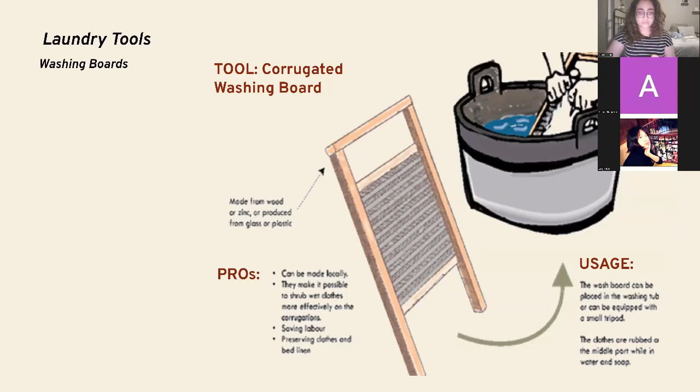Some tools used by people in these rural areas are iron trays, natural or man-made stone slabs, and metal barrels. Instruments like washing boards, washing dollies or plungers, and centrifugal hand washers can make doing laundry easier and more time efficient.

Source of water for community to do laundry. We have different sources of water in Freetown. First is the water wells, the tap, and this also is a water well, but we normally call it Jackie body. And this is a water mill at town. So these are the various sources of water that we have and that we use to do our laundry in Freetown.

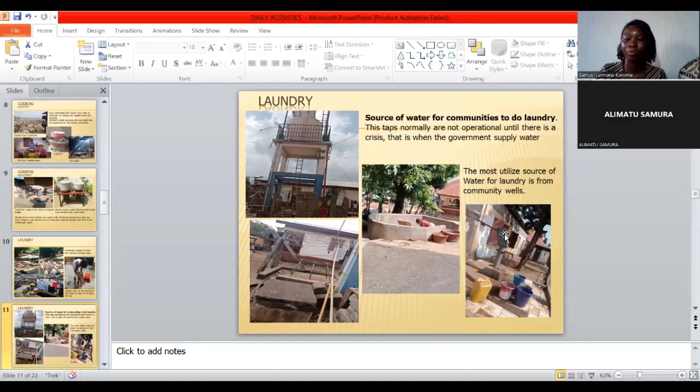Okay, I'm going to go through the toilet facility used in developing countries. My research focused on dry toilet that operates without flush water and covered 3 types of it.

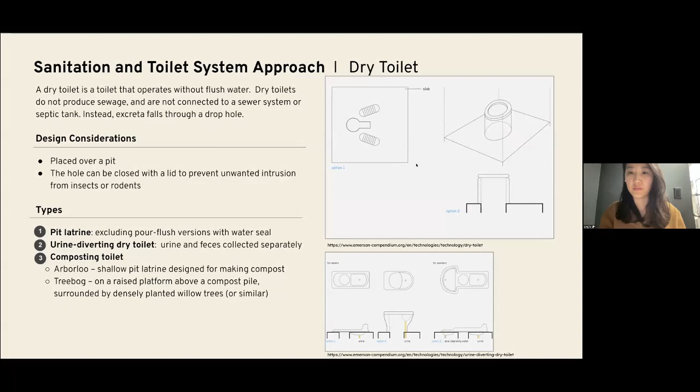Raised latrine is designed to minimize the risk of contamination in areas prone to flooding. This system includes the fence for ventilation, and the superstructure offers privacy and security, but it might not be inclusive design, and there's periodic empty cost and could be an unhygienic solution unless waste is safely disposed.

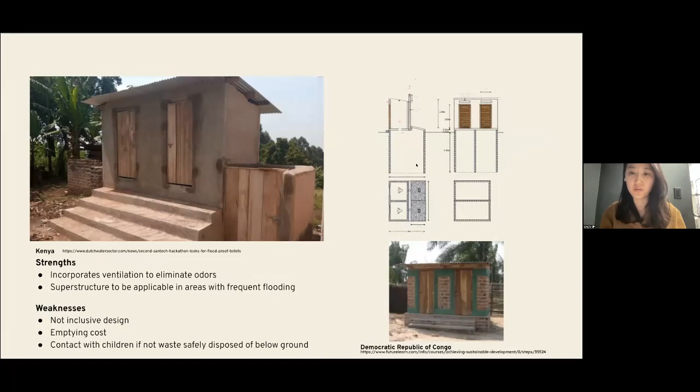Urine-diverting dry toilet typically consists of 2 separate collection systems, allowing for more efficient decomposition. They usually use sawdust to control odors and absorb moisture.

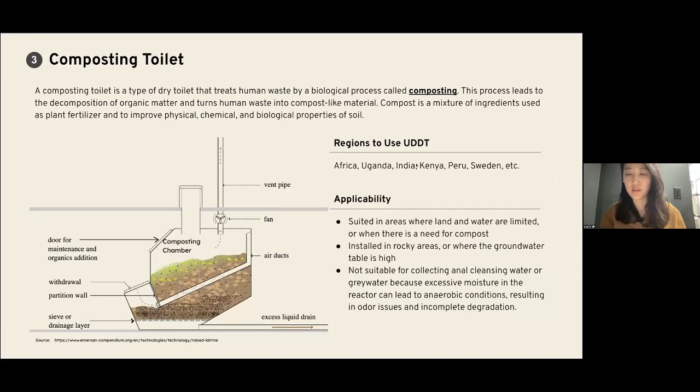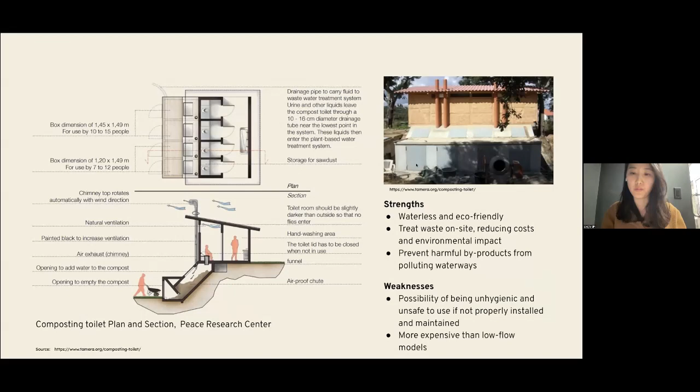Composting toilet is a system that converts waste into compost through a natural decomposition process. This is an example of composting toilet, and this system treats waste on site, which means it could prevent a harmful byproduct from polluting the waterways.

Continuing from there, we have an indoor toilet space. A space for buckets and water storage is very important for our toilets because most of the houses in Freetown do not have running water.

We also have a dedicated outdoor toilet, which is mostly used in some homes. The most common toilet, which is a pit toilet, is finished with porcelain tile, and it is mostly used in homes for general use.

Bathing in many rural areas is often a simple and yet enriching experience, marked by a connection to nature and a reliance on traditional practices. One method of bathing happens in rivers and streams, where access to plumbing and bathing facilities is limited. While this is an eco-friendly method, it can also pose sanitation and hygiene challenges.

Buckets and containers are another very popular method of bathing. Bucket baths are common in many developing cultures, not just in rural areas. To take a bucket bath, a person typically fills a bucket with water, often heated on a stove or with another heating element, then uses a mug or container to pour the water over themselves.

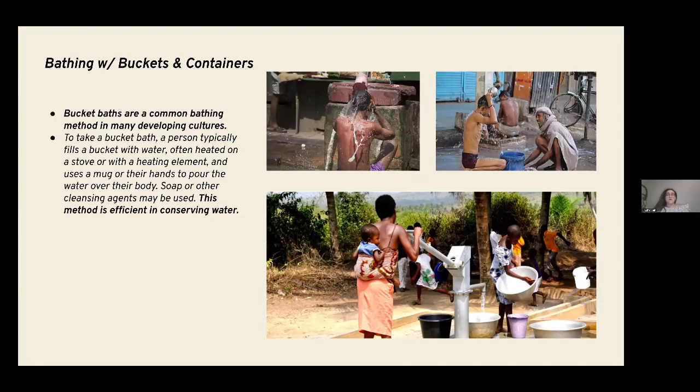Indoor bathing is where the bathroom is included in the building. Indoor bathrooms are mostly finished with tiles or fair-faced concrete, with space for barrels to store water for bathing. Most showers do not work because of low water pumping power from the local supply, which is not accessible to most homes. A wascup bowl used for bathing is used to collect water from the bucket and pour it on the head.

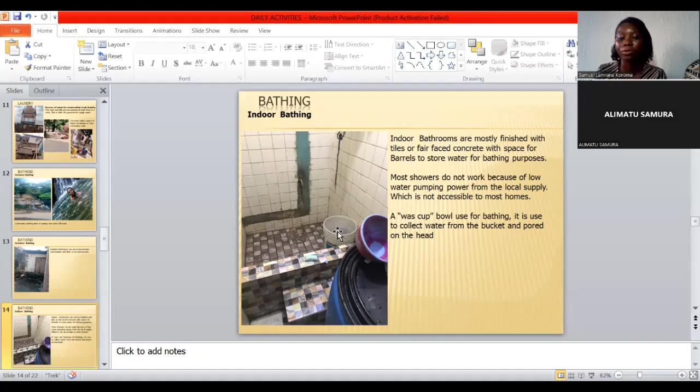Next, we'll talk about public and private spaces. One of the things we researched was what makes a great public space. There are 4 components to a great public space: accessibility, activities, comfortability which is included in the design, and sociability, which is the sense of excitement one feels when entering a space filled with other people.

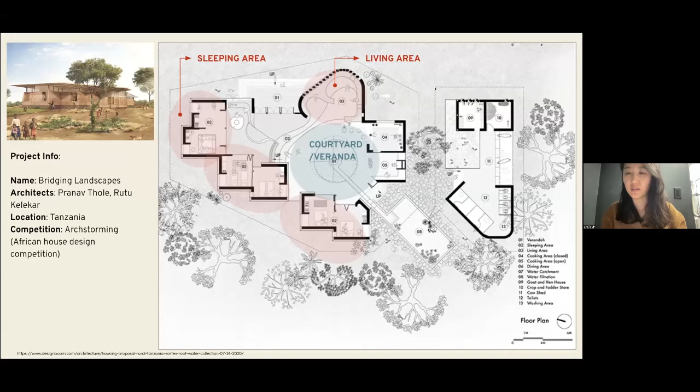I'd like to introduce 2 low-cost house projects in Tanzania. In the first one, I want to highlight a multifunctional space between the inside and outside, which is a large central courtyard functioning like a veranda. The courtyard is designed as a semi-open space, allowing opportunity for large family gatherings.

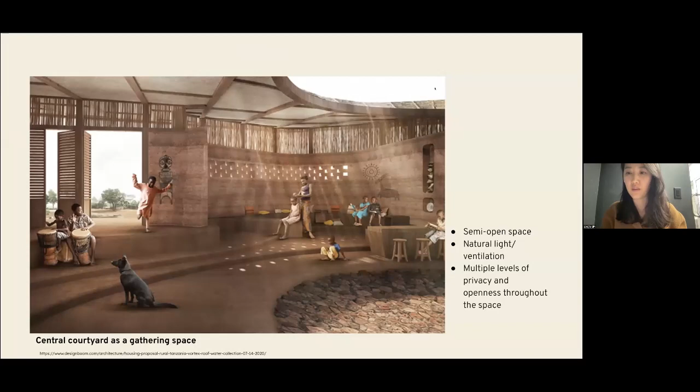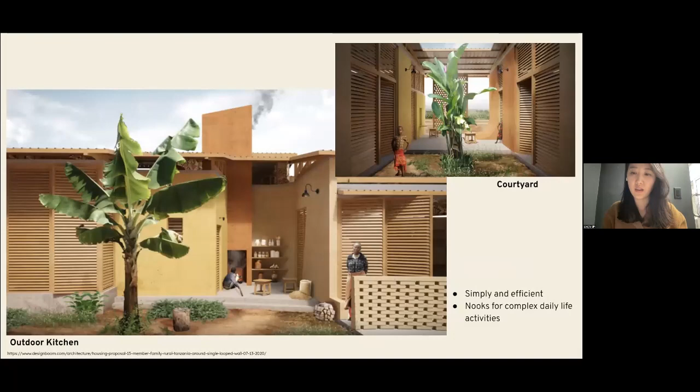The second project features a simple and efficient program arrangement along a linear axis on the site. It highlights flexible space with temporary partitions, utilizing nooks for daily life activities. This living area blends indoors with outdoors, generating healthy environments.

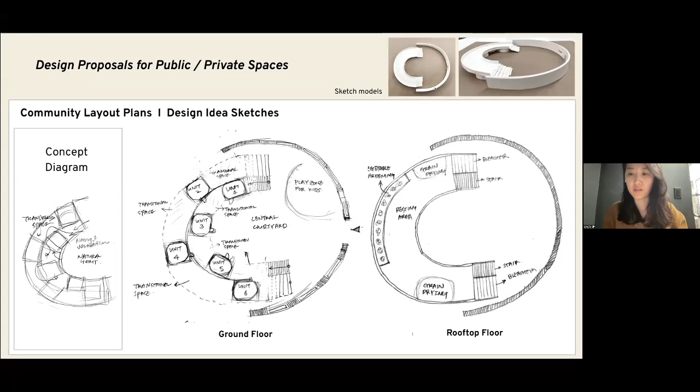Here I'd like to point out my design ideas for shared space in a community. Individual units are arranged in a zigzag pattern, and the rooftops are connected as a whole to more efficiently use the space. There are bleachers as part of the steps, providing space where people can interact. By building a C-shaped exterior wall, it can create a central courtyard, allowing various functionalities such as cooking and dining, kids play, relaxation, and so forth.

My design proposes utilizing the rooftop for small vegetable gardening to support daily lives. In part of the courtyard, it suggests addressing the need for a safe playground for children. By constructing circular seating around a big tree, we can create a more comfortable gathering space with shade.

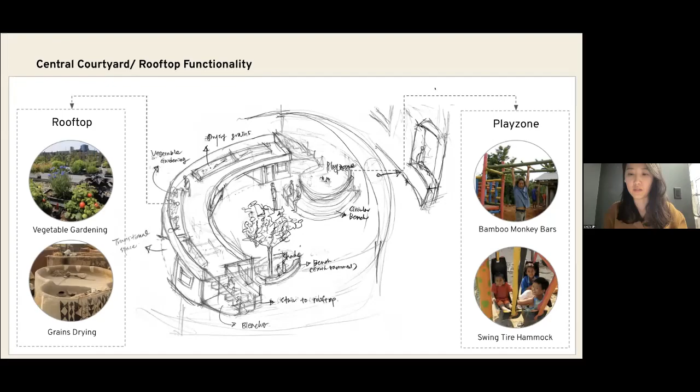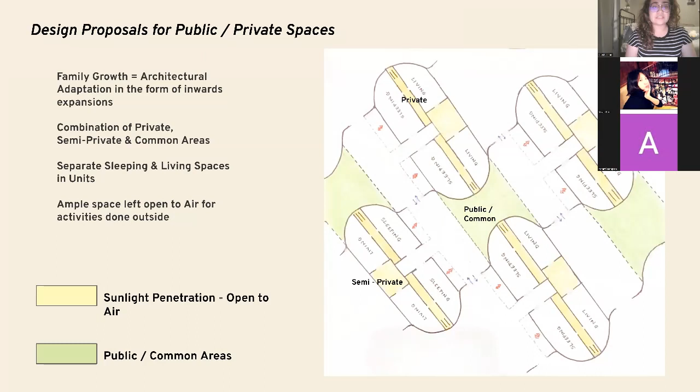For my design proposal for public-private spaces, I focus on family growth in regards to an architectural adaptation form with inwards expansions. This is a system of 8 units aggregated together. In each unit, you have a separate sleeping and living space, with a narrow corridor in between left open to sunlight with space for drying clothes and activities, etc.

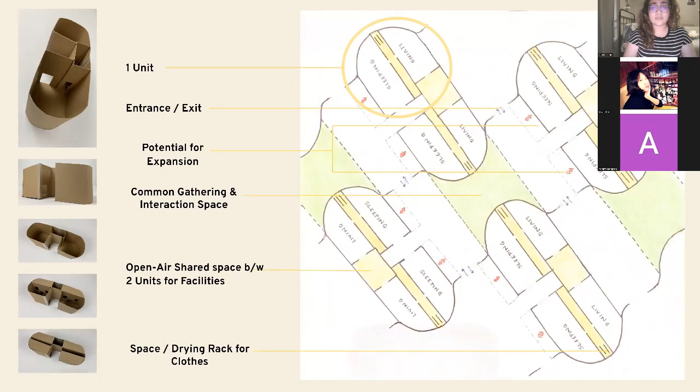Each unit can access a semi-private space that is also left open to sunlight and air for activities such as laundry and open-air cooking. This space is shared between 2 units as a semi-private space.